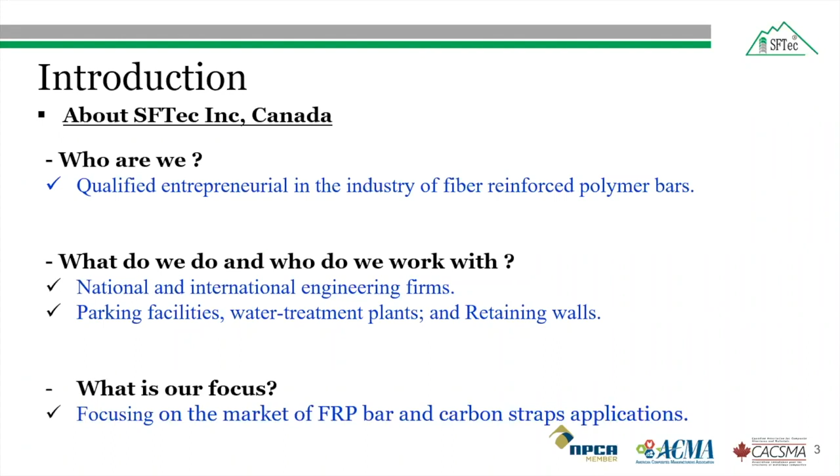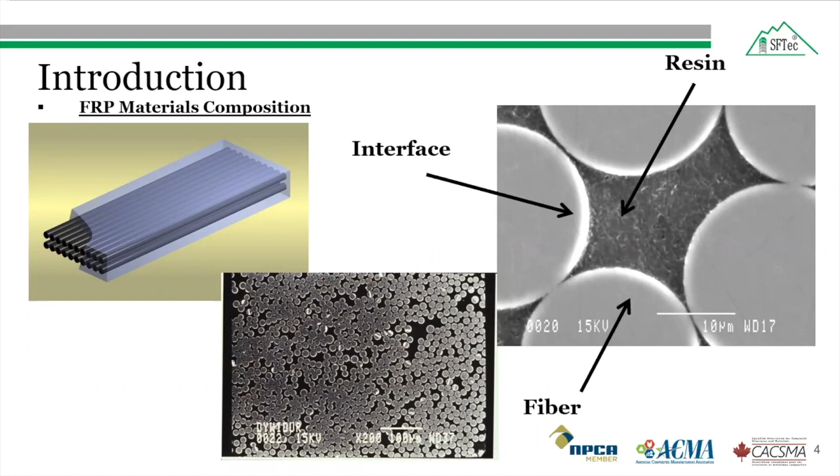The SFTec FRP bar is made of composite materials, either fiberglass or carbon fiber. It is manufactured by a process called pultrusion using a mix of recycled fiber and resins. Here the figure shows a microscopic view of the FRP bar.

There are 3 different types of fiber reinforced polymer bars available in the market. Now there are 4, but I am presenting only 3 here: carbon, aramid, and glass. The 4th one is basalt, on which research is still going on. The stress strain plot shows how these FRP bars compare with steel bar, and 2 points should be noted from this plot. First, the glass fiber reinforced polymer has lower strength compared to the other 2 FRP bars. Second, the strength of all fiber reinforced polymer bars is higher than the steel bar. However, their behavior is linear elastic up to failure.

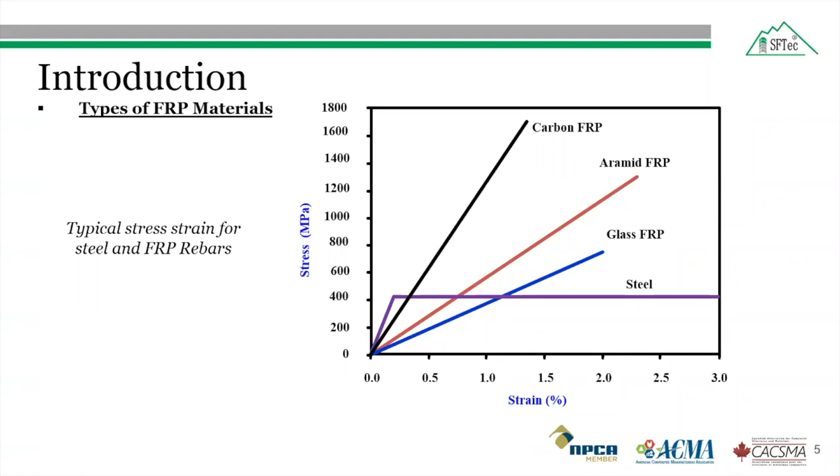In our products, we have different types of FRP products depending on the project requirement. Some of the FRP bars we produce are straight bars, spiral, and stirrups for transverse reinforcement, bend bars, and glass fiber reinforced polymer shear connector, which is the topic of today's talk. The glass fiber reinforced polymer bar is widely used due to its production cost and better tensile strain compared to the other fiber reinforced polymer bars. That's why most of our products are made from glass fibers.

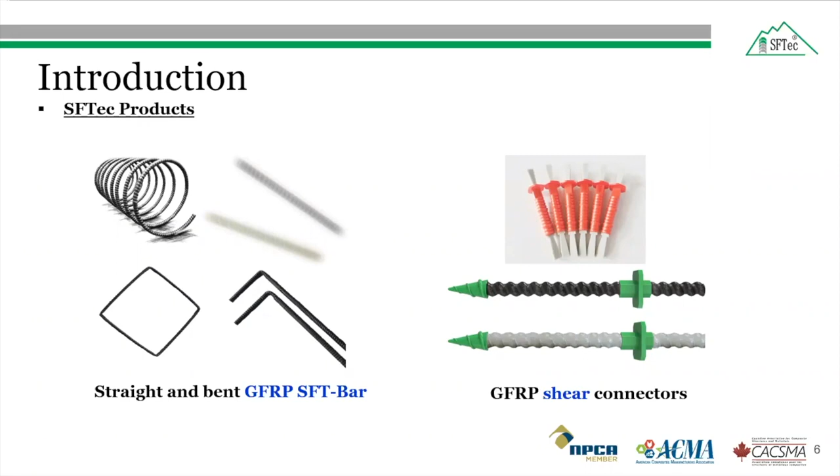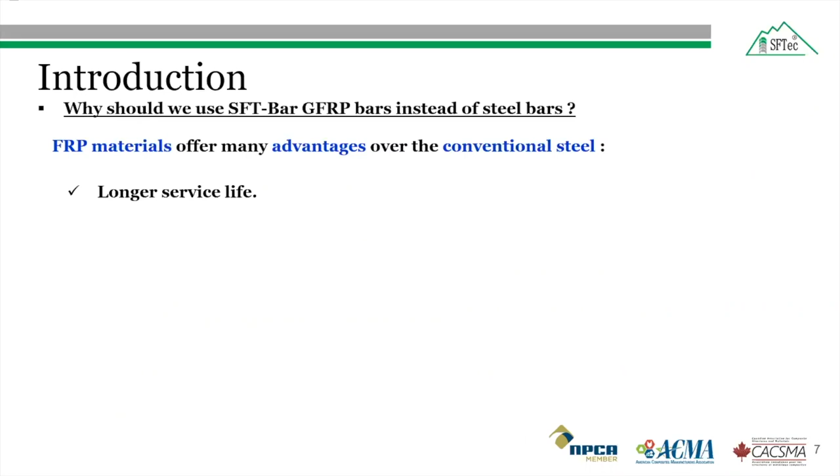Some of the advantages of the SFTec glass fiber bar over conventional steel bars are: it has a longer service life because of its corrosion resistance, and therefore improved durability in harsh marine environments, such as construction near coastal areas, and in North America's cold climate.

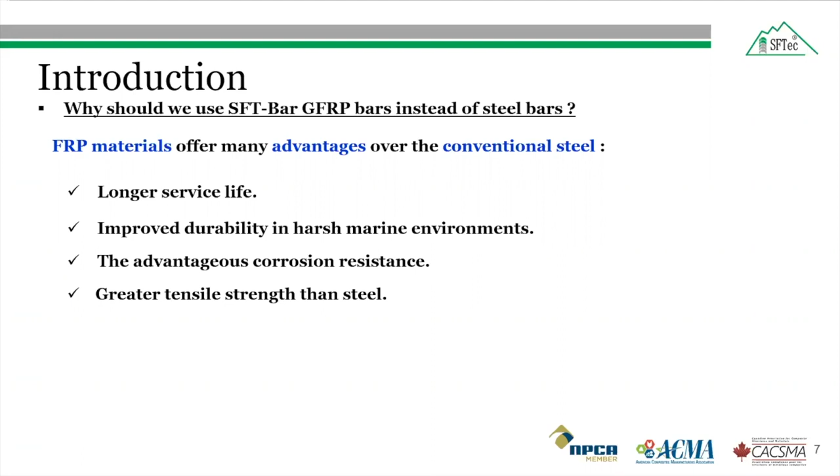The FRP bars have better resistance against corrosion compared to steel bars. As I told earlier, the tensile strength of FRP bars is 2 to 3 times more than that of steel bar. FRP bars are lighter due to their low density compared to steel bar. And due to the corrosion resistance, FRP bars are good for harsh chemical environments as well. It is also neutral to electrical and magnetic disturbances, useful for applications such as airport, military applications, MRI rooms, and hospitals.

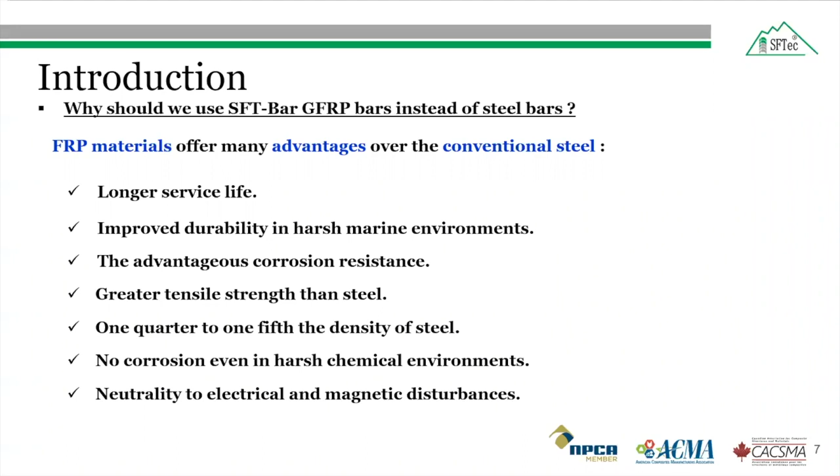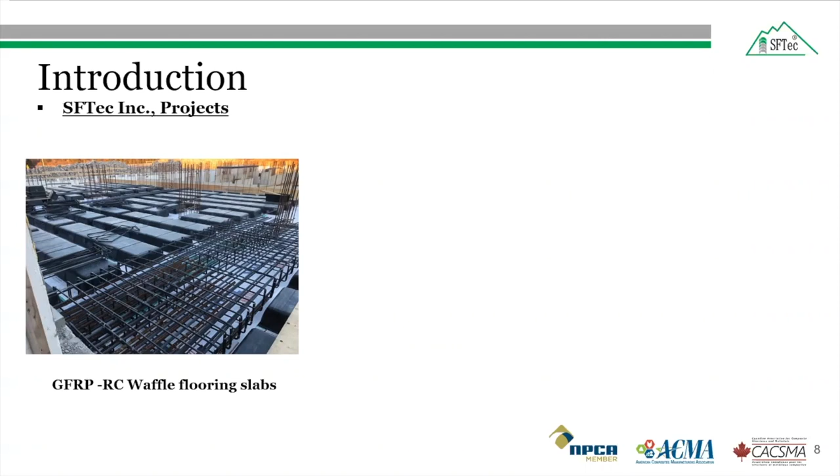Some of the selected field applications of SFTec FRP bars we have already done in Canada are GFRP reinforced concrete waffle flooring slab designed with SFTec glass fiber reinforced polymer bar, built last year in Halifax, Nova Scotia. It can also be used for slab on grade. It is a non-structural slab, not a one-to-one replacement, and it saves a lot of money compared to steel bar in terms of labor and transportation.

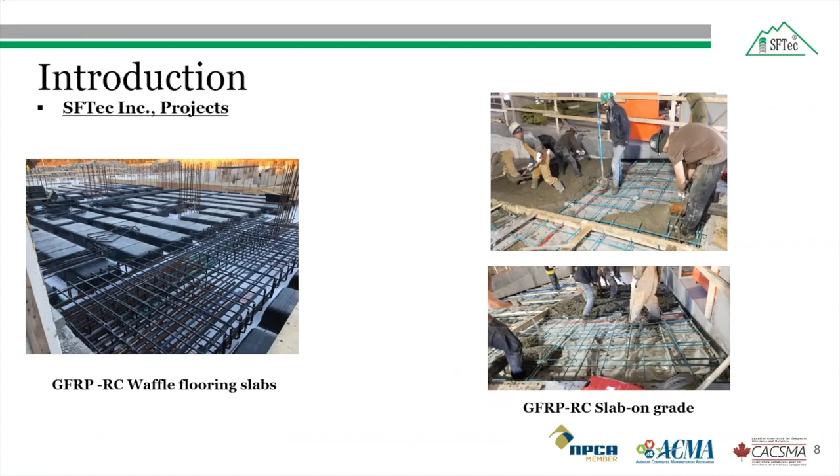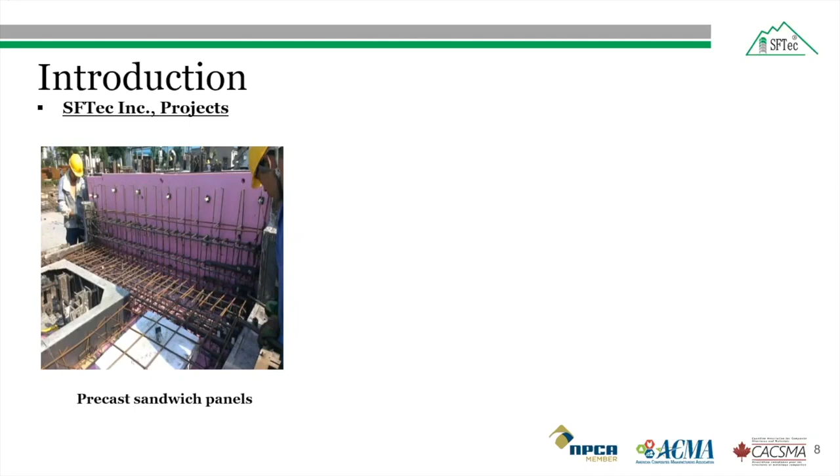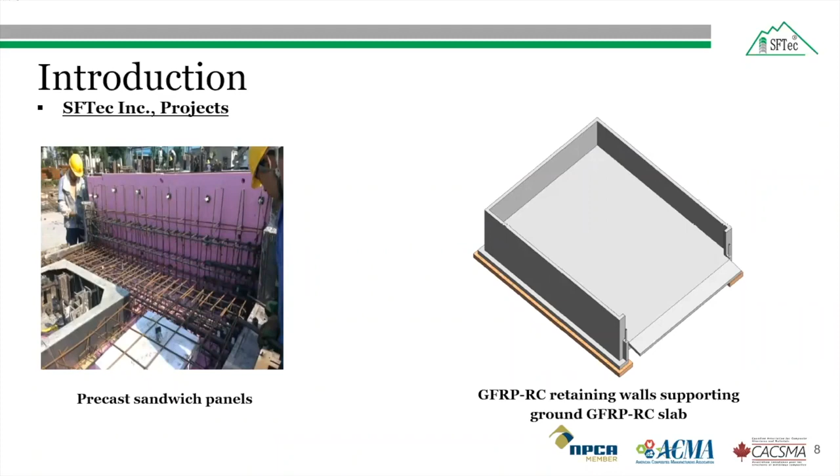Another project shows cast in situ precast sandwich panels, using our glass fiber reinforced polymer bars as reinforcement, built in China. On the right is a retaining wall built for the city of Montreal. The retaining wall is designed to hold snow with de-icing salts during the winter, and so they built this retaining wall with SFTec glass fiber reinforced polymer bar, which provided resistance against the chemicals used in the de-icing salts.

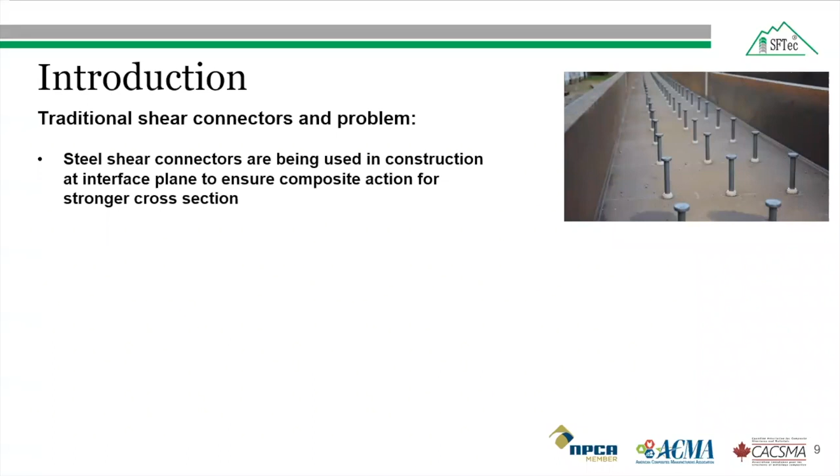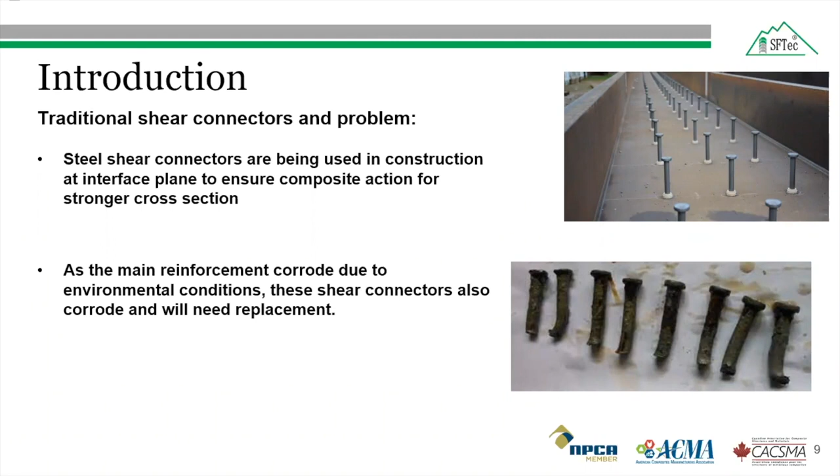Traditional steel shear connectors are used in bridge construction, also called studs, at the interface plane between the cast in place deck slab and the precast girder to ensure composite action for a stronger cross section. But as we know, in North American countries, as the bridge deck slab corrodes over time due to environmental conditions, these shear connectors also corrode and need replacement, especially in Canadian winter where de-icing salt is used. The corrosion of the steel shear connector results in gradual loss of the composite behavior and strength of the composite action.

So fiber reinforced polymer connectors have shown to be an effective alternative to conventional steel connectors due to their resistance against corrosion. It is lightweight and also non-conductive and magnetic free. We'll discuss why the non-conductivity of the FRP is helpful.

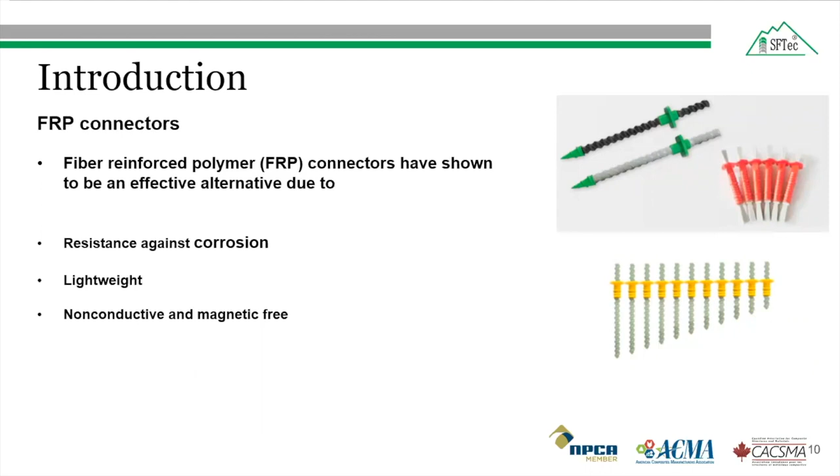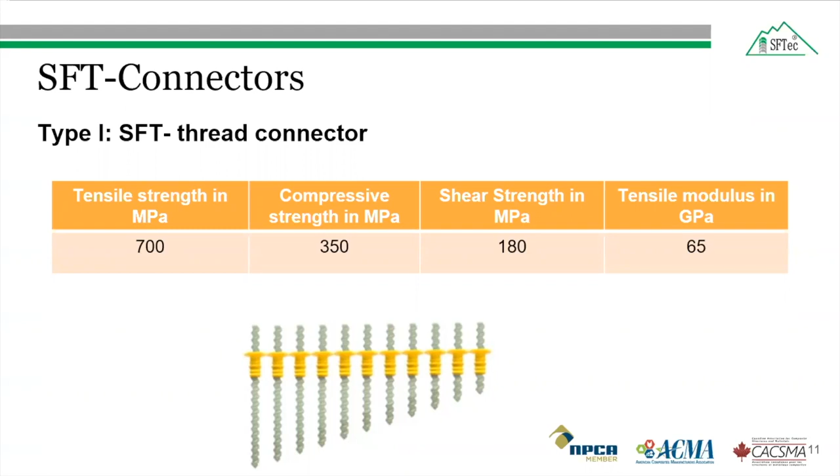With SFTec connectors, we have generally 3 different types. The type 1 connector is the SFTec thread connector, with a tensile strength of 700 megapascal, 180 megapascal shear strength, and tensile modulus of 65 gigapascal. The second type is the SFTec flat bar, with tensile strength of 600 megapascal, shear strength of 120 megapascal, and tensile modulus of 45 gigapascal.

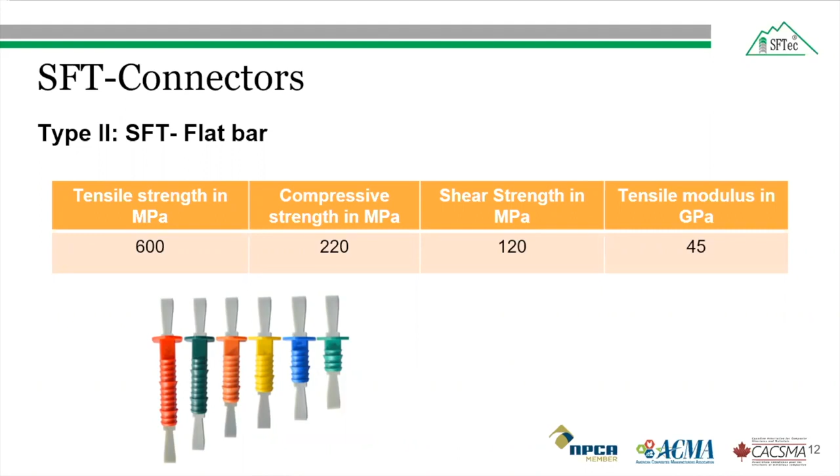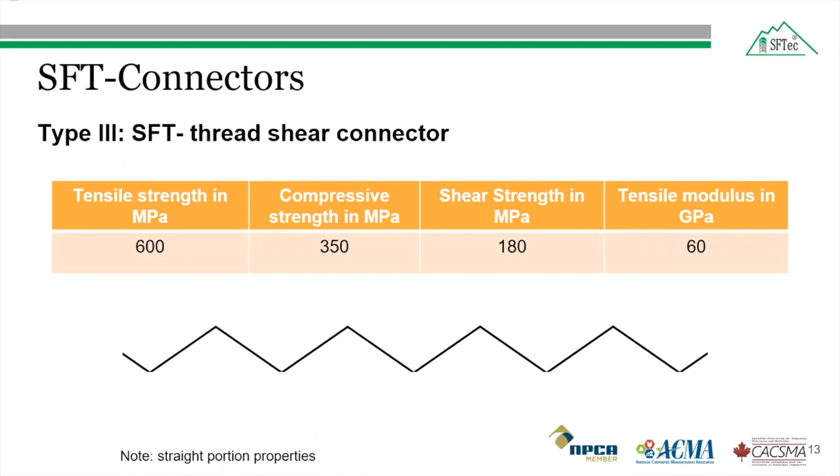Finally, the third type is the SFTec thread shear connector, which has a tensile strength of 600 megapascal and tensile modulus of 60 gigapascal, and its structure is like a truss. It is worth mentioning that all SFTec connectors are made up of fiberglass. The shear connectors are used to transfer in-plane shear forces between 2 wythes. As we can see in the figures, there are 2 concrete wythes at the 2 ends.

The sandwich panels are usually designed as one-way structural slabs, and shear forces are generated due to the longitudinal bending in the panels. The shear connectors may be used to transfer the weight of a non-structural wythe to a structural wythe. The GFRP connectors are used for thermal insulation purposes in the precast concrete industry, such as plant precast and cast in place projects.

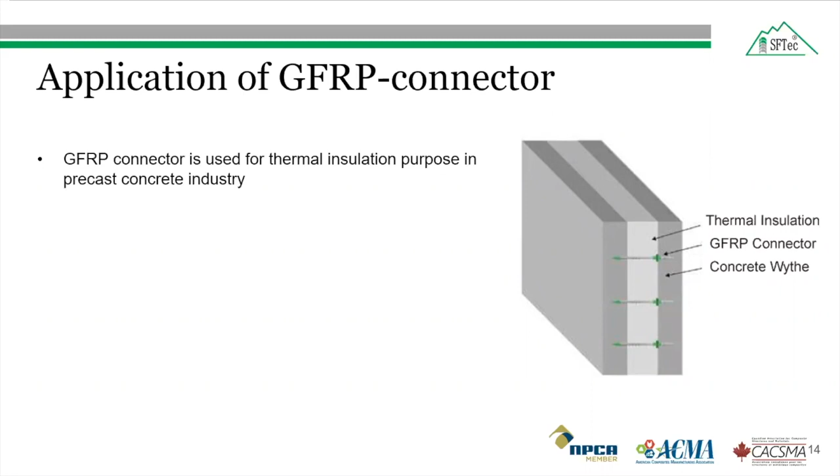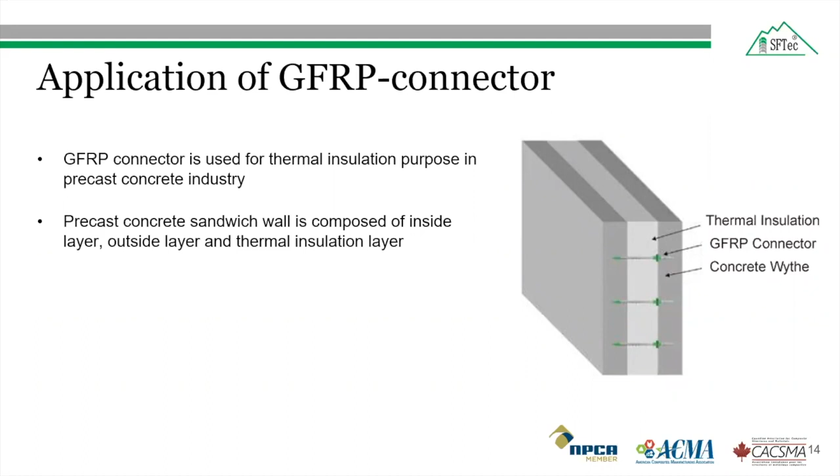The precast concrete sandwich wall is composed of an inside layer, outside layer, and thermal insulation. The thermal insulation is generally between the 2 concrete wythes. The FRP thermal insulation connectors are used to connect these 3 layers, and they can not only bear the weight of the insulation and outside layer, but also bear the wind load, earthquake load, and other kinds of loads.

Two cases will be presented today. One deals with the thermal resistance of GFRP connectors, and the other with shear capacity.

The first case study is an experimental investigation of thermal properties of insulated concrete sandwich panels with fiberglass shear connectors. Increasing economic and environmental costs of space heating and cooling have generated renewed interest in improving the thermal resistance of building envelopes.

At the same time, rising construction costs are driving designers to select prefabricated elements which can be constructed with higher quality control and in less time than traditional construction. Precast concrete sandwich panels, also known as insulated concrete walls, are thermally efficient prefabricated elements that can address both of these needs.

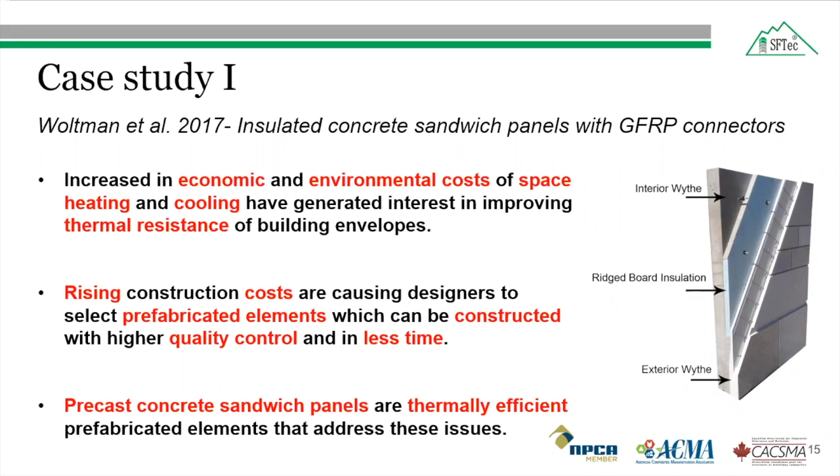Steel connectors are widely used in the industry but also have the highest thermal conductivity of the connector materials available. Concrete is also used to connect the wythes in fully composite panels. However, a large area of concrete is required, which creates a large thermal breach.

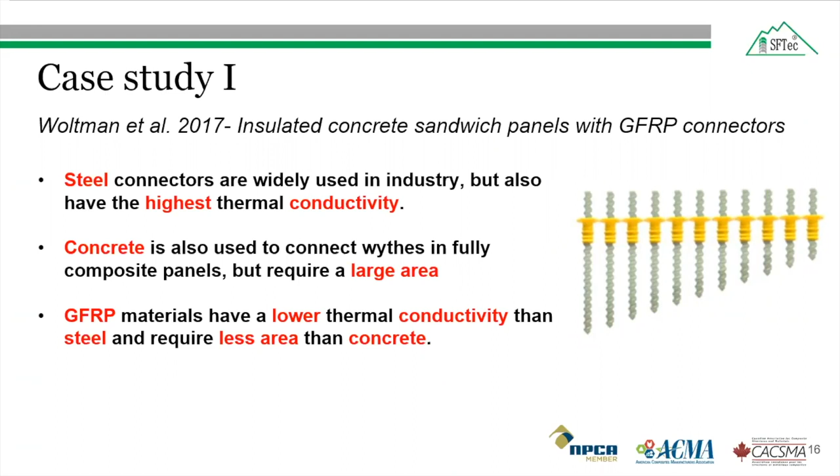Over the past two decades, rising energy prices have encouraged the development of alternatives to traditional steel reinforced designs. Glass fiber reinforced polymer, or fiberglass, materials have significantly lower thermal conductivity than steel, generally ranging from 1/60th to 1/30th that of steel, and require less bearing area than concrete to hold the two wythes together.

In case study 1, the test setup was a hot box apparatus used to determine the thermal behavior of the insulated concrete sandwich panel. The test cell had two chambers, a cold chamber and a hot chamber. The cold chamber, also known as the climate chamber, had a temperature of minus 4.3 degrees Celsius.

The other chamber, the hot chamber, also called the metering chamber, was kept at room temperature, 25 degrees Celsius. Both chambers were made up of precast concrete box culverts with an octagonal cross section, as shown in this figure.

The space between the two chambers is adjustable for various thicknesses of test panels. This sandwich panel is the test specimen used for testing, and a circulating fan adjacent to the heater was used to increase air velocity inside the hot chamber so that it remained consistent across the surface of the panel.

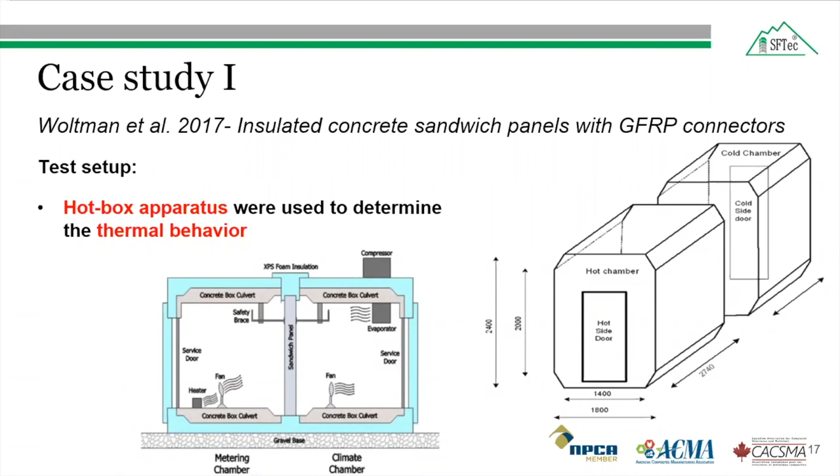The back of each chamber in the hot box apparatus was left open to allow the test panel to be installed. This figure shows how the test panels were installed inside the hot box.

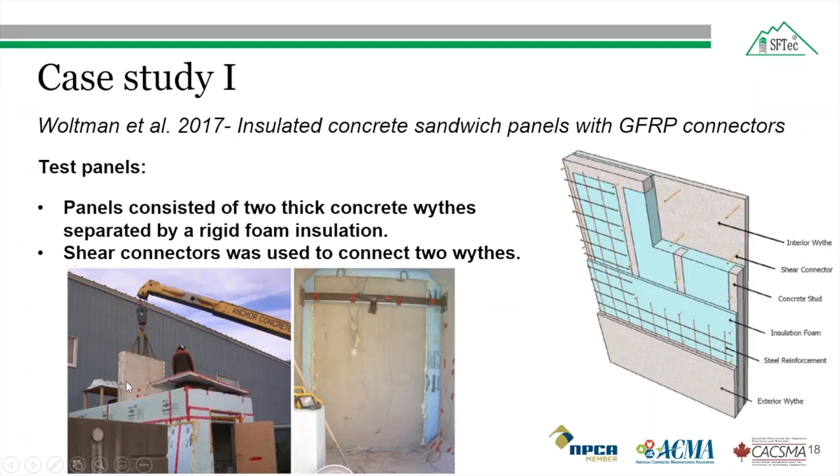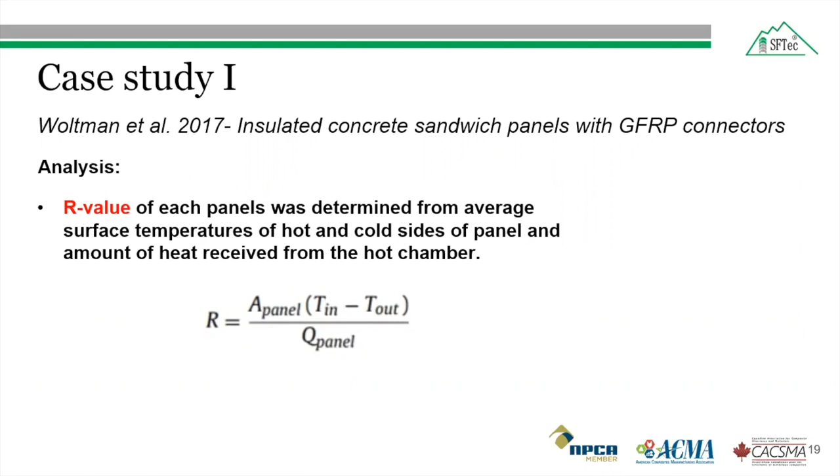The thermal resistance, or R-value, is the ability of the insulation material to resist heat flow. The R-value of each specimen, in square meter Kelvin per watt, can be determined from the average surface temperatures of the hot and cold sides of the panels and the amount of heat received from the metering or hot chamber. In this equation, A_panel is the area of the test panel, T_in and T_out are the surface temperatures facing the hot and cold chambers, and Q_panel is the heat received by the tested wall.

Coming to the results from case study 1, two panels were constructed with similar numbers and dimensions of shear connectors, one reinforced with steel connectors and the other with GFRP connectors. The GFRP, or fiberglass shear connector, panel was found to provide equivalent or better thermal resistance than the counterpart steel connector panel, due to the lower thermal conductivity of glass fiber reinforced polymer compared to steel, which minimized the effect of thermal bridging.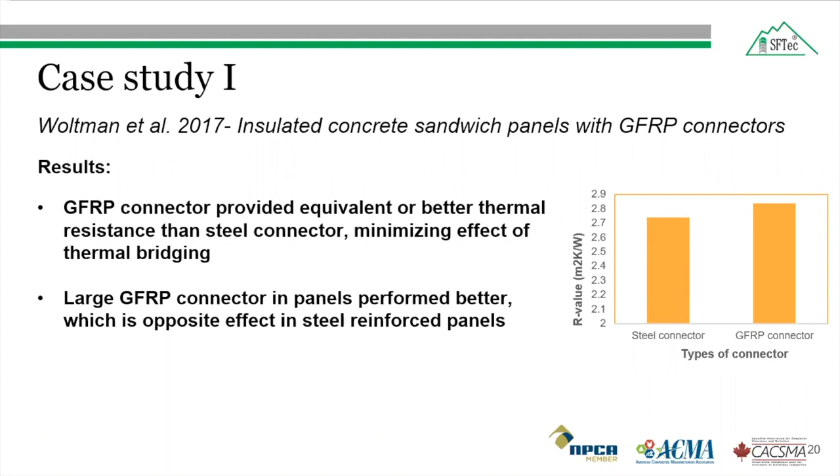The other conclusion drawn from this study was that the large glass fiber reinforced polymer connector panel resulted in a 60% increase in thermal resistance compared to the control panel, which is the steel panel reinforced with steel connectors. This result is the opposite of what we expected for steel reinforced panels, as the increased connector area of the steel would lead to more thermal bridging, since steel has very good conductivity.

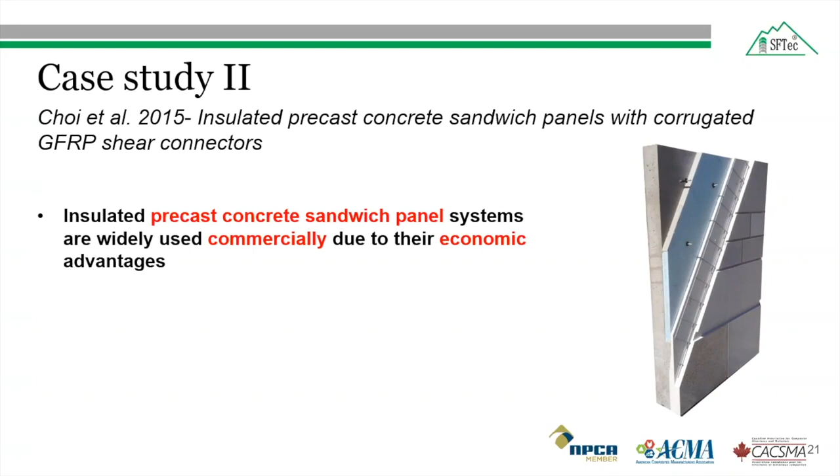Now the second case study talks about the in-plane shear behavior of insulated precast concrete sandwich panels reinforced with corrugated GFRP connectors. As I told earlier, insulated precast concrete sandwich panel systems are widely used commercially due to their economic advantages and superior thermal and structural efficiency. The panel consists of exterior and interior precast concrete panels separated by a layer of rigid foam insulation, which enhances the thermal efficiency of the system.

The two discrete thin concrete wythes help resist applied load by changing the shear transfer mechanism of a conventional concrete wall panel. The figure below shows the glass fiber reinforced polymer shear connector that incorporates a 45-degree angle to the shear plane and is 5 millimeters thick. Variables of the GFRP connector were used to investigate the toughness of the shear connector, including its pitch, height, and width.

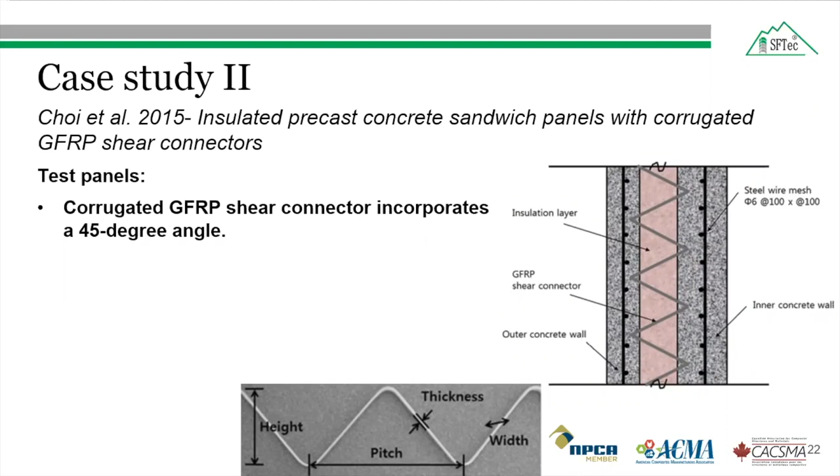The specimens were supported vertically at the bottom edges of the two concrete outer wythes on steel blocks. A displacement rate of 5 millimeters per minute was used for the specimen. A vertical load was applied through the load cell and steel block in line with a 1000 kilonewton hydraulic jack to the top surface of the inner concrete wythe to produce direct shear force across the interfaces.

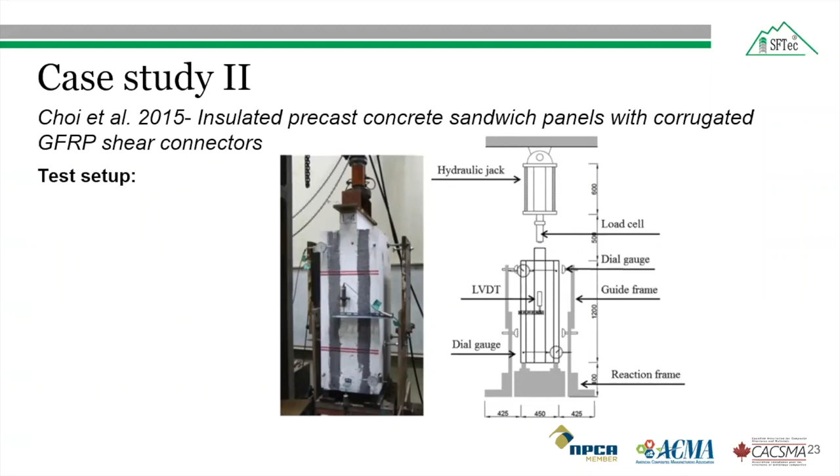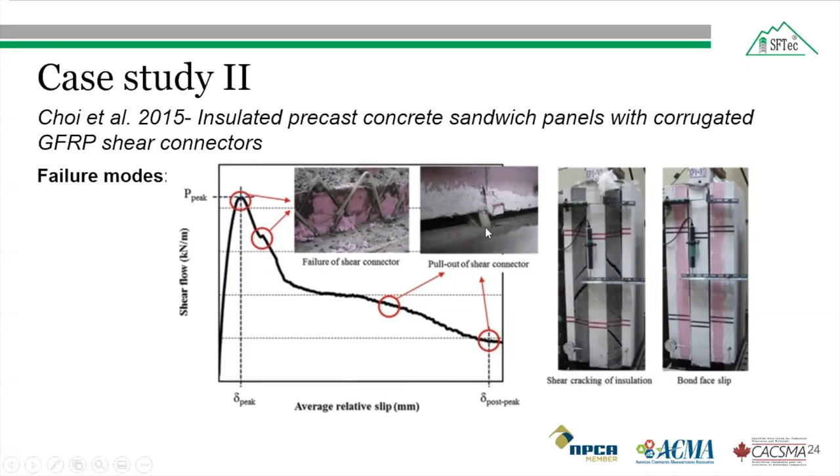The failure mode observed after the test showed the strength of the panel reduced after maximum loading, followed by failure of the shear connector, and shear cracks in the insulation and delamination of the concrete and insulation were observed. As the rate of displacement increased, the load gradually decreased. The specimen failed with pullout of the shear connectors when the embedded length was not long enough.

The results drawn from case study 2 were: the increased width variable of the GFRP connector was used to investigate the toughness of the GFRP shear connector, along with its pitch and width. An increase in the width of the corrugated GFRP shear connectors tends to increase the stiffness and strength of the specimen, and with an increase in the pitch, the in-plane shear strength increases, resulting in higher tensile strength of the shear connectors.

So from these two case studies, what we found is that in the first case study, the thermal resistance of the GFRP connectors is better than the steel counterpart connectors. The GFRP connectors, even when a larger size is used, will provide better thermal resistance compared to the steel connectors.

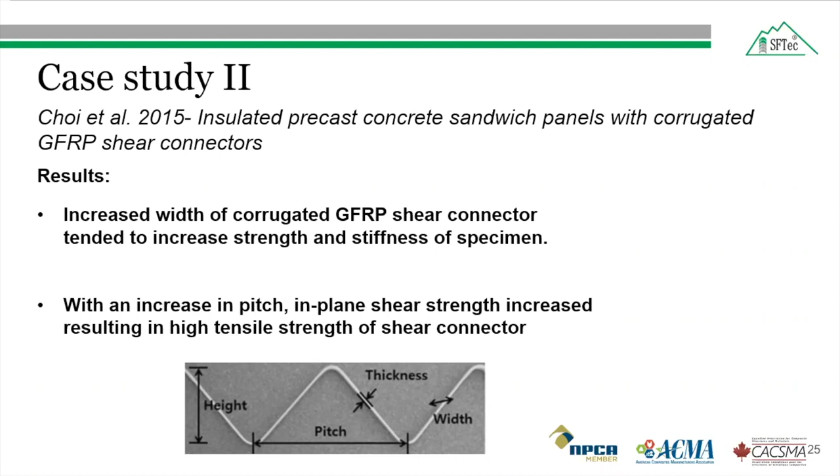And in the second case study, the shear strength of the GFRP connectors provides better insight into how much pitch, width, and height of the GFRP connector should be used in the precast sandwich wall so that it can provide sufficient shear strength.

So as I told earlier, we have 3 different types of SFTec connectors which can be used for different construction projects, like in insulated walls, slabs, or precast elements, and these bars can be modified according to the project requirement.

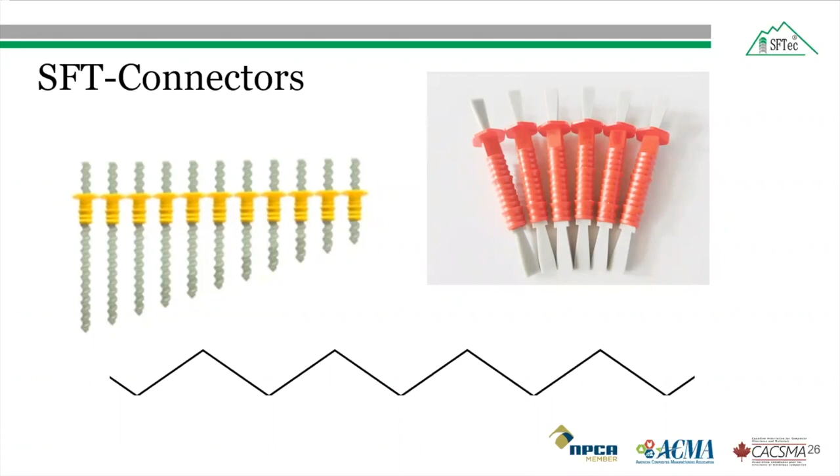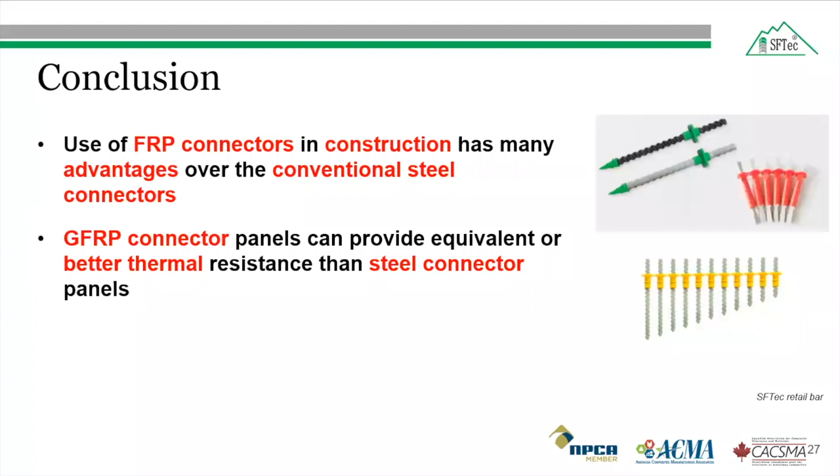So in conclusion, due to the corrosion resistance, lightweight, and magnetic-free nature of FRP connectors, they can be used in construction, replacing the conventional steel connectors. GFRP connectors in precast insulated sandwich panels can provide equivalent or better thermal resistance than steel connector panels, due to the low thermal conductivity of GFRP compared to steel.

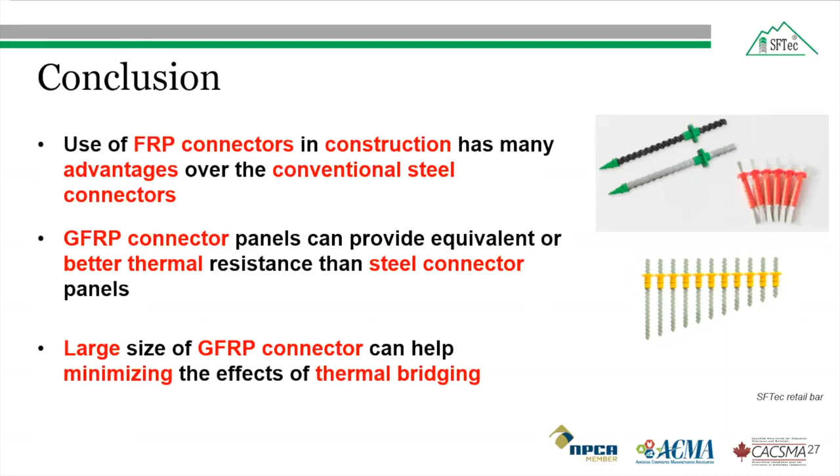And finally, the large size of GFRP connectors in precast insulated panels provides better thermal resistance, which is the opposite effect of what would be expected from steel connectors, as increased steel connector area would lead to more thermal bridging. Thank you very much for your kind attention.